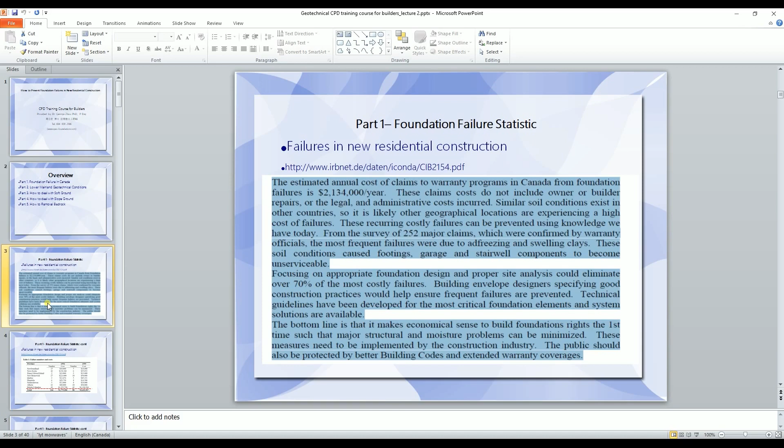Okay, the first part is the statistical analysis of foundation failure in Canada. This analysis was done about 10 years ago, and the reason I use data from 10 years ago is that it's fairly difficult to get this data, especially recent data. With any failure, people don't like to talk about it so much. So this data comes from an insurance company - they sent out inquiries to all those owners who suffered from failures, and this is the only data available to me. The absolute dollar value probably isn't accurate because it was 10 years ago. But the interesting thing is the percentage of failures, the failure distribution among all those provinces. I'll show you later on.

Okay, this one shows failures in new residential construction. You see that's in 1994 and 1995. In British Columbia, looking at the dollar value - you don't need to look at that, but you see the number - we had 43 failures in '94, and overall in Canada we had 164. So in BC we have about one-third of all failures happening here.

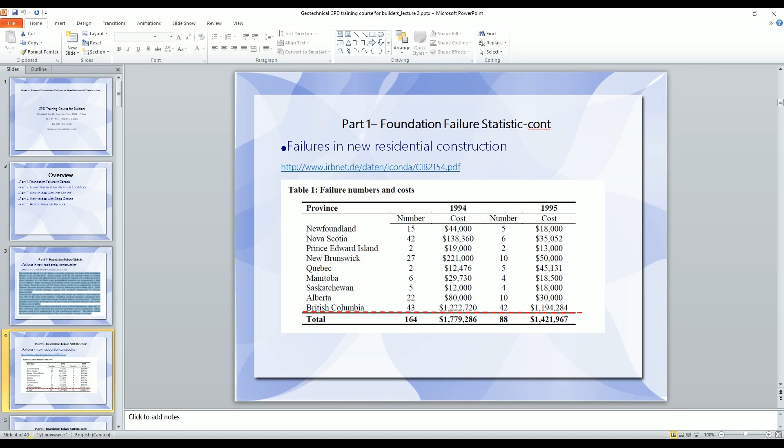The same thing, actually in 1995, about half of them happened here. Overall in Canada we had 88 failure cases, but in British Columbia we had 42. So that implies we have lots of failures happening locally in BC.

And this slide gives us a percentage failure, the failure ratio per 1,000 new buildings. So in BC, for every 1,000 new buildings we have about 2 case failures. This ratio is quite high, but compared to other provinces, other provinces are much higher, especially Newfoundland.

And the reason they have high failure rates is because of 2 reasons. One is they don't have enough engineers, especially good engineers, over there. And the other reason is about the weather - the weather over there is fairly cold, so they have lots of permafrost problems.

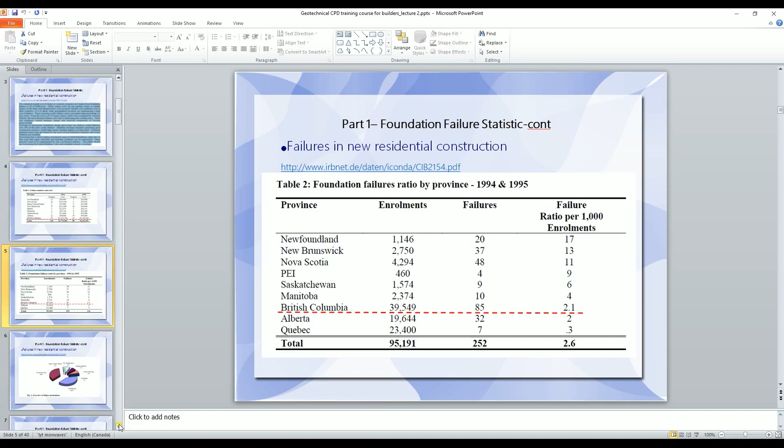This one is very interesting. The failures divide into different reasons. You see, most reasons are because of adfreezing, which relates to permafrost. And luckily, here locally we don't have these issues. Especially in the lower mainland, the frost depth is fairly shallow.

But if you take that half away, you see all of these other things can happen in BC. Most of them, like clay, means soft ground. If we take this out, soft ground is one of the major reasons - this is the highest one, this is the second highest. But in BC we don't have the permafrost problem, so one of the major reasons here is about clay, meaning soft ground.

And the second thing is fill settlement, also related to compaction of fill material. The next biggest one is slope failure. So later on we will talk about all of these - settlement, soft ground, and slope stability. That's why today we have this topic, like I mentioned previously.

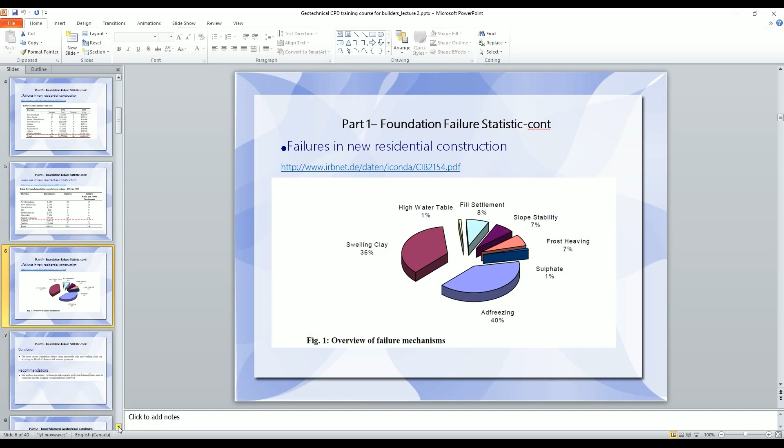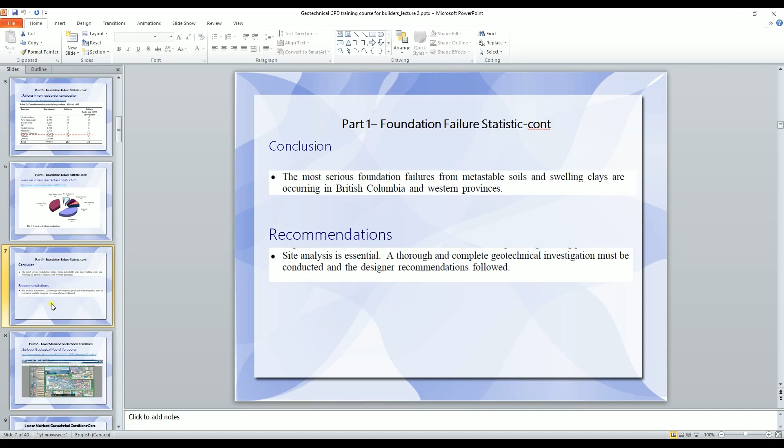Okay, the conclusion from part 1 is that the most serious foundation failure is for soft ground, soft soil, occurring in British Columbia and all over the western provinces. So my recommendation to everybody here is that site analysis is fairly important. For every site we need to do a geotechnical site investigation and understand the soil condition first, and then we can do the design properly.

Now, next I will talk about part 2. Maybe if you came previously, you are fairly familiar with this already.

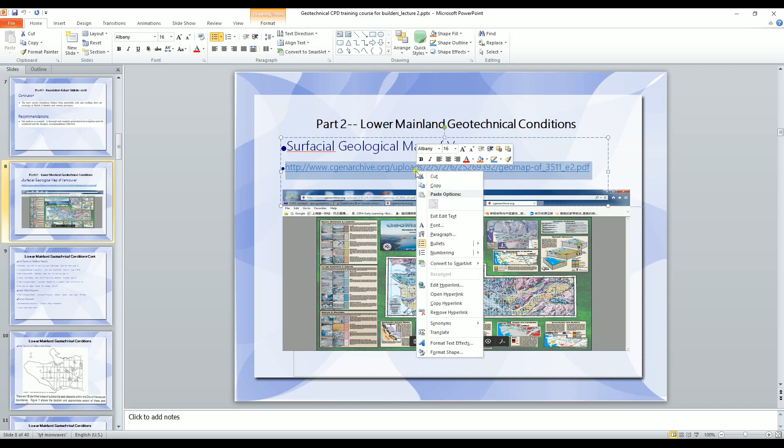In this map, I think the link isn't very clear, but let me copy this one. So this is the internet, right? If we come to here, that is the website, which is public government information. Everybody can access it. So it's free information for everybody.

In this map, you can see different sites in different areas. For example, in Richmond, we have two different zones. Most of them: west of No. 3 Road is one color, and east of No. 3 is another color. The color, they label this number 2, or number 3 maybe. I don't know how to enlarge it... okay, we can enlarge it.

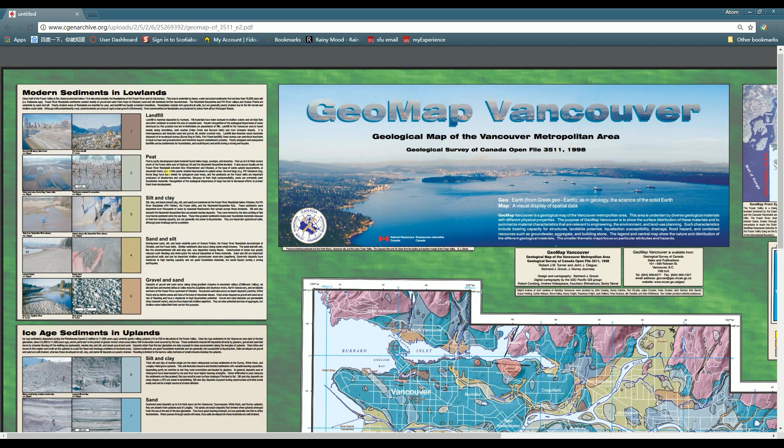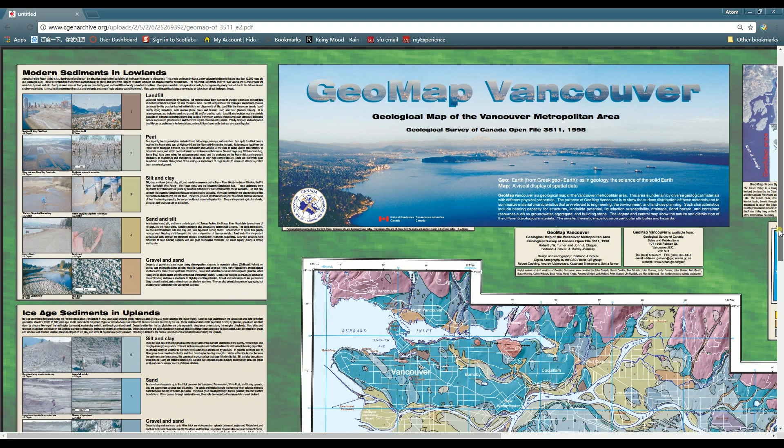This is number 2, this is number 3. If you read here, the legend tells you number 2 is peat, meaning organic material, and this area's organic material is fairly soft with fairly high water content. If you put a foundation directly on this soil, the water will be squeezed out and the foundation will settle a lot. So most of the time, if we build anything here, we need to do preload or use pile foundation.

The other side, which is silt and clay, is also fairly soft in the Richmond area. They have fairly high water content, and this material has a fairly low plasticity index, meaning during an earthquake it can liquefy. So for this area, when we design the foundation, we need a crust layer so that during an earthquake, after the underlying material liquefies, you have a temporarily enlarged footing that can prevent punch failure.

Like in North Vancouver and West Vancouver, the city requires that for any development of one unit, you can only remove a certain amount of bedrock. In West Vancouver, they allow a single house to remove only 600 cubic meters of material. If you remove more than that, you have to revise your design.

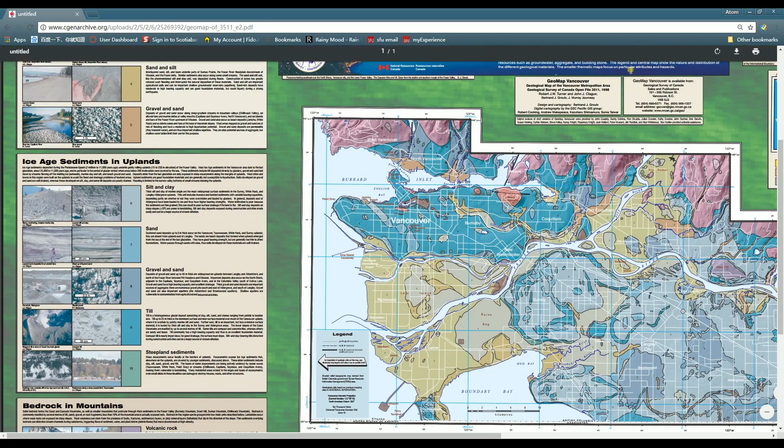If we look the other way around, upstream of the Fraser River, like in the Surrey area, we have clay, which is type 6 — clay and silt. This clay and silt is quite different from the clay and silt in Richmond's west end, because it's deposited at a higher level. The water content is lower, and relatively speaking, the capacity is still low, but slightly higher than in Richmond. Anyway, this is public data. Everybody should pay attention when you purchase land — you should read this map first and understand what material, what soil, you are dealing with.

Okay, let's go back to our PPT.

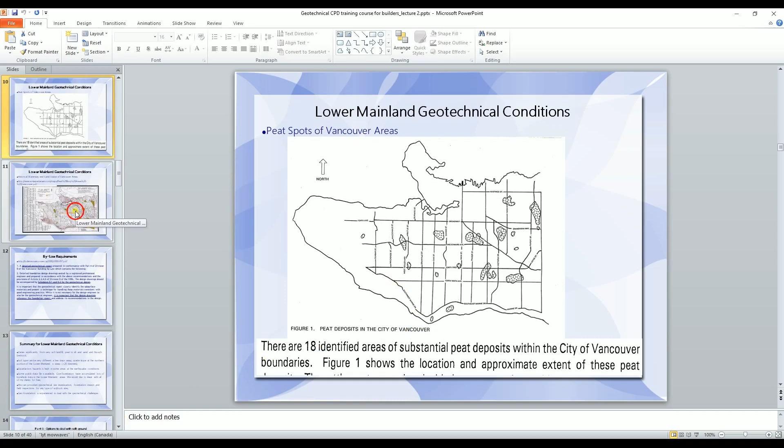Having talked about this, the soil condition is much more complicated than what we discussed previously. For example, in Vancouver we say the condition is fairly good, but actually that's not exactly true. Locally we have some variations. This map shows you 18 spots, very famous spots. This area is the location where you have peat. So overall, Vancouver is good, but you still need to pay attention to these particular locations.

The other thing you need to pay attention to when you purchase land is the historical use of the land. This is also available online. In addition to the 18 spots we talked about previously, this map also shows green lines, which are streams that existed maybe 100 years ago or even earlier, and these creeks were filled in. So if you build a house in this area, you need to pay attention.

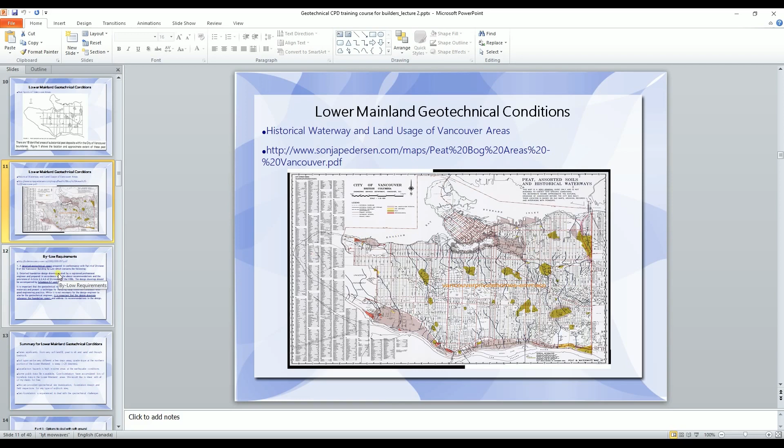A few weeks ago, I had a site in the English Bay near Alberta Street. This area has an existing building. When we went over there to do site investigation, we hit peat ground, from before 1982, when the old house was built and the creek was filled, but they had not removed the soft ground. So now we will demolish the house and build a new one. We found this is a problem we need to think about how to deal with.

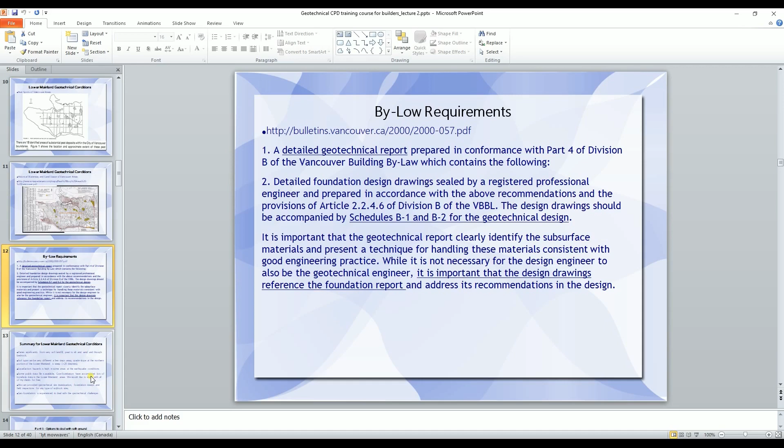If you have very weak material like peat or soft clay, city bylaws have requirements for foundation design. The city used to require a geotechnical report, but right now they haven't made it mandatory for a geotechnical engineer to design the foundation. The structural drawing can show the foundation design, but they ask the structural engineer to refer to the geotechnical report. That's the current requirement.

So the summary for part 2 is: overall, in the Lower Mainland, the site soil condition varies significantly, from very soft land to very hard ground. Soil type can be very different just a few steps away, and some areas are fairly steep, like in North Vancouver, where the ground can be over 20 degrees, so they have slope stability issues too. Also, lots of areas have liquefaction hazards in earthquake conditions.

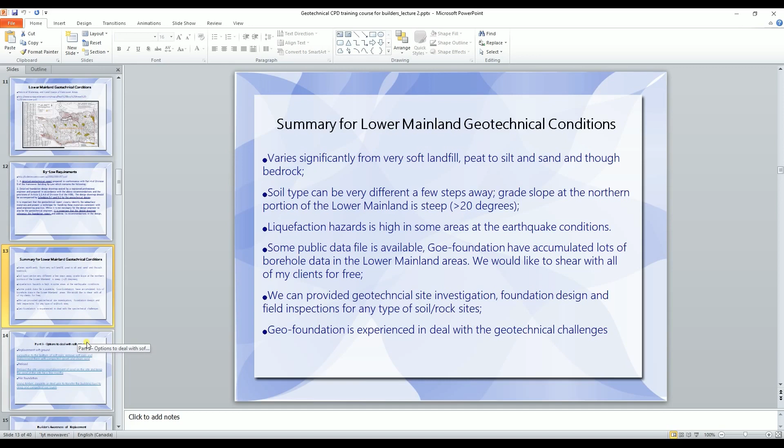But anyway, that data is publicly available and free. Everybody can access it. My company can also provide all that data to you. In addition to the public data, we've accumulated lots of boreholes in the Lower Mainland area over the last 20 years. It's really a good idea: by the time you make a decision to purchase land, you need to ask your realtor. If the realtor has no geotechnical background, you'd better ask a geotechnical engineer.

That's part 2. Well, we're going very fast. I think we still have time.

Now I'd like to talk about part 3, which is: while you do every effort and find out, talk to your realtor, talk to your geotechnical engineer, and the ground is not good, when you purchase land you put a term in the contract saying subject to review of a geotechnical report. By this time you've got the land, and you hire a geotechnical engineer to come do site investigation, and they find the area does have soft ground.

Then we need to deal with the soft ground. Soft ground is not the end of the world. We geotechnical engineers can deal with it anyway. We have different ways to deal with it, and some of them are fairly cost effective.

For example, if the soft ground is not so deep, less than 2 meters shallow, and the water level is over 2 meters deep, for this condition usually we can replace the soft ground. That means you do excavation, remove the soft soil, and replace it with sand and gravel, compacting it layer by layer. After doing so, you can put your foundation on the compacted material.

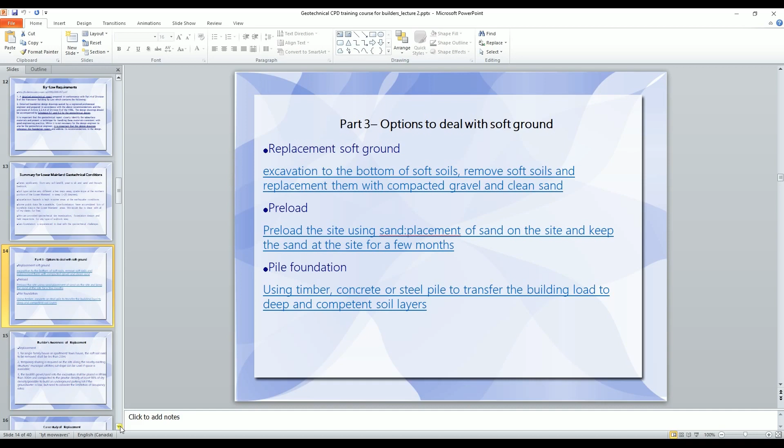The other thing for timber piles is decaying. The sections permanently underneath the water table will not decay, it will be good forever. The portion always above the ground is also okay. But one section sometimes gets submerged, sometimes becomes dry. Because the water table fluctuates seasonally, those sections can decay, so you need to pay attention.

Usually, previously we needed to put some chemical material so that it wouldn't decay. I don't know what the chemical name is, but anyway, that's one of the reasons timber pile right now is not so popular.

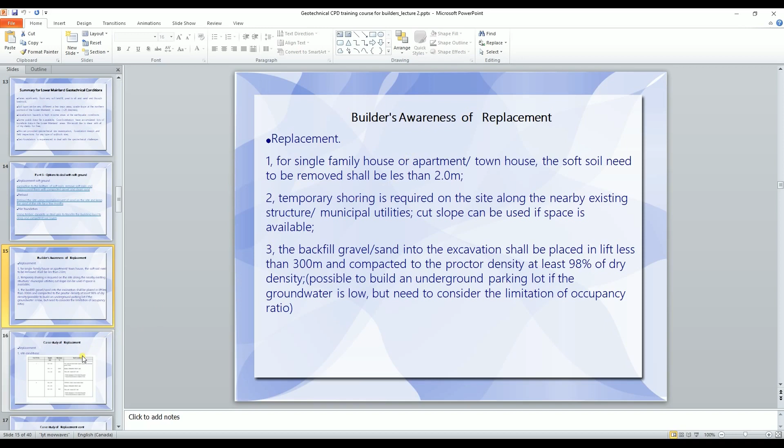Okay, actually for this one, the further description of replacement, I think we mentioned that already, right? I think we told this already. This is one example of the site condition where we use replacement, which is in number 6 Road.

And in a farmland, we did site investigation, and this is the soil condition. The top, like 1.2 meters, from 0 to 1.2 meters is organic peat. The top is fill, and within this we still have some silt. But if we remove 1.2 meters of material, for the residential building that's good enough.

So for this case, we decide to remove the top 1.2 meters material and then build it that way. Here is the way, the building goes over there. The top 1.2 meters material is removed. But be careful, when you remove it, you've got to remove slightly larger - the footprint should be slightly larger than your building.

And you've got a slope, like a 2-to-1 slope, and while you do excavation, you do it this way. So the excavation area is also larger than the area where you put back the material.

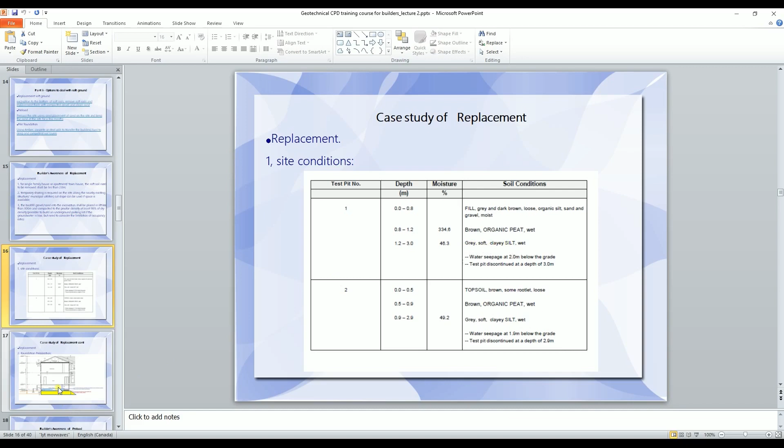Because if you still remember the borehole log, after the 1.2 meter materials, we still have soft clay. So the soft clay can also settle. So we did some calculation and made the decision that in this area where you backfill 0.6 meters, that 0.6 meters should be lightweight material.

Okay, and the second option, we talked about preload already. For preload, I think every builder needs to be careful. Preload is not as simple as just dumping some sandy material aside and leaving it for a few months, then removing it and you can build. No, it's not so simple.

Actually, the right way to do it is we need to do site investigation and we need to do the preload design, to determine the preload height - how much material, how high and how big the footprint we need to preload. Especially for some areas, if you develop in phases, like phase 1, phase 2...

For a big area, if you're using preload, usually the land is fairly large, and most builders would like to build it in phases so that you don't have cash flow problems. And while doing this, you need to decide how big phase 1 needs to be preloaded, and make sure the next phase preload will not impact the phase 1 structure. So those things you need to take into account.

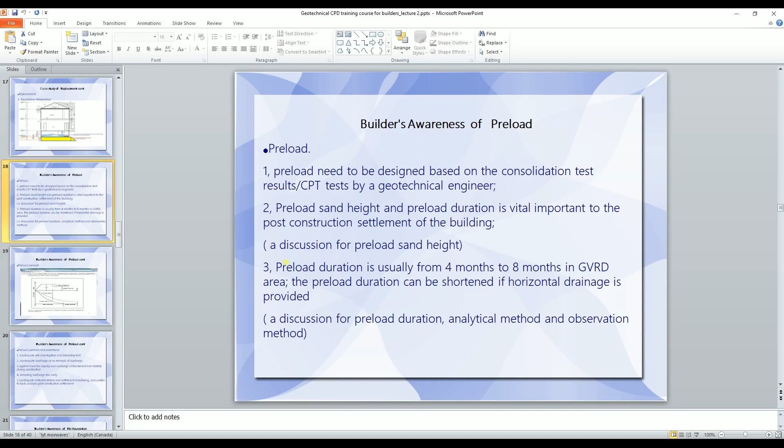The preload design, actually, for the time and height, when we design it, we need to take some soil samples aside and do a 1D consolidation test in the laboratory and find compression index and compression coefficient.

And you need to know the drainage layer distribution. Based on the 1D consolidation theory, you can predict how high the preload will be and how many months, how long the preload needs to be at site.

Which have rebar extending from the base all the way to the top of the sand, and the survey guy needs to come. The first week they come probably every day. The first month they come at least every week, and second month they come like once a month, less frequent.

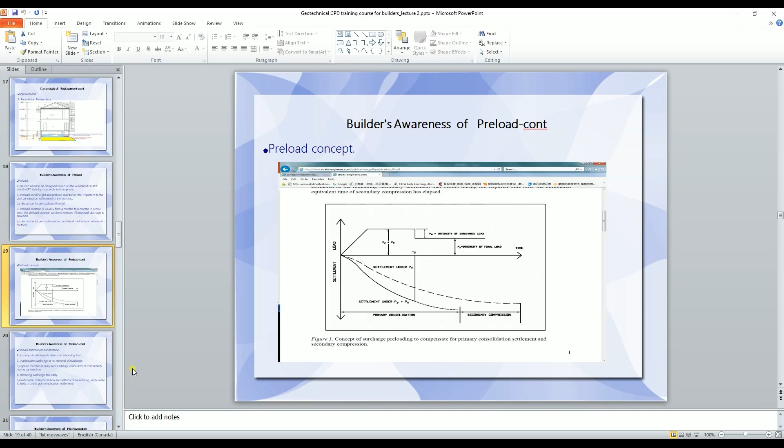And how long you have to keep it dumped on it. If you dump only a week or a few days and remove it, you will not achieve the intention. Even though you preload it later on, you still have problem.

So those are some common misunderstandings of the preload. One is inadequate site investigation and laboratory test. Means your site investigation didn't go deep enough, for example, too shallow. Your weak material is thick, and the thicker it is, the more settlement there will be. If your site investigation is not adequate, you will have problems later on.

The other thing is because the site information is not so clear, so when you do design, your surcharge height, meaning your preload material, is not enough, or you remove your surcharge too early. Even very professional guys can make this mistake.

One famous settlement case is an airport in Japan. They have had settlement for many years. I cannot remember the city name, but it's a world famous case. The area is huge, very large, and near an island. The whole airport is created by infilling the waterfront, and the predicted settlement in the airport's life, they say, is only 1.2 meters, but actually in the first 3 months they settled 1 meter, and right now they're still settling.

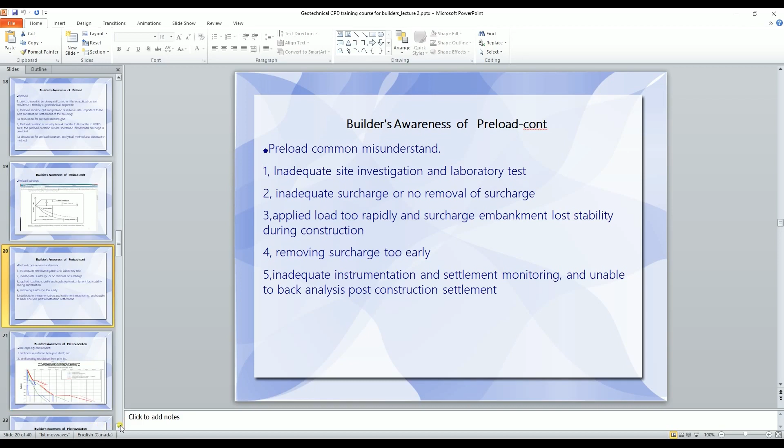Okay, let's keep on going.

The next one we will talk about is the pile foundation. As a builder, you need to be aware that the function of pile is to pass the load from the shallow depths through the pile structure, through the pile element, to the underlying hard ground. While you put a loading on the pile, there are two resistances from the pile: one is the friction from the pile shaft, the other is the bearing resistance from the pile tip.

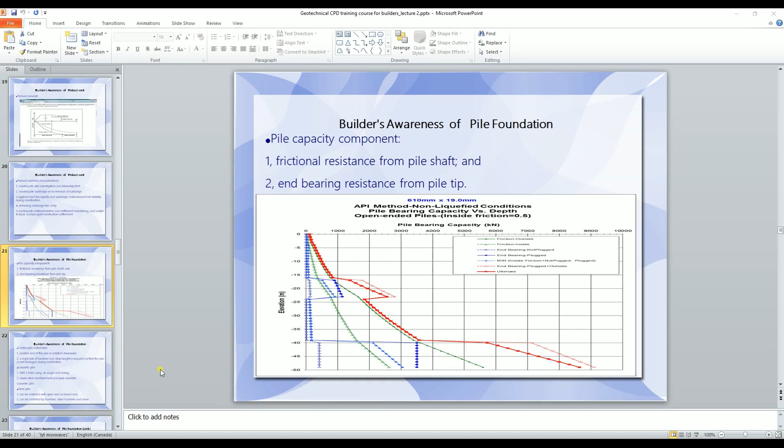The pile resistance, the friction resistance, comes from the lateral earth pressure. The lateral pressure multiplied by the friction coefficient, multiplied by the perimeter area of the shaft, gives the shaft resistance. The bearing resistance is the bearing area multiplied by the unit bearing capacity.

Previously we said we have different types of pile. For example, we have timber pile, and when we install a timber pile, we need to install it upside down - meaning the small end needs to go downward, and the big diameter on top. That's the way we squeeze the pile into the ground so we have friction on the shaft. If we do otherwise, it's very difficult, even impossible to install, because it tips this way while loading.

While you install a pile, the pile is not pushed against the soil but tries to leave a gap in between, so you don't have shaft resistance. Make sure you install it the right way.

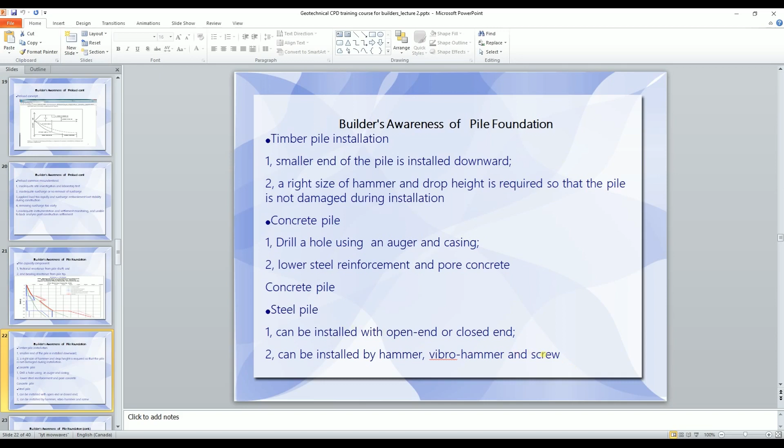And for steel pipe pile, usually their capacity is fairly large. So when we install it, we can use a diesel hammer, or we can use a hydraulic hammer. Quite often they are used for industrial facilities, and for example, for bridges, those things.

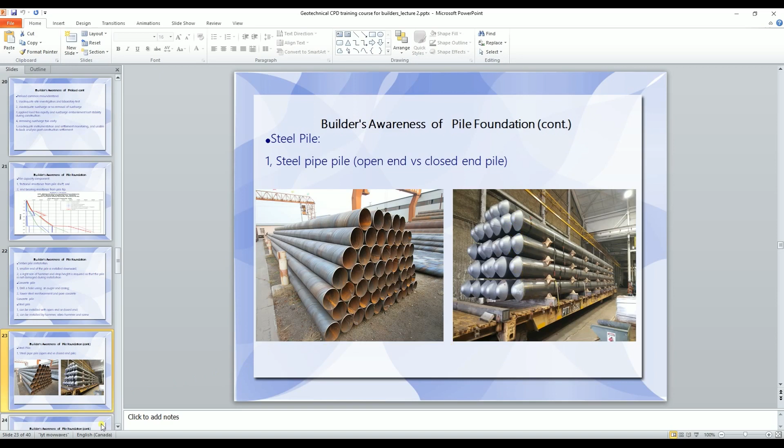For residential buildings, instead of the steel pipe pile, we are using the screw pile. I can show you - this is the steel pipe pile, and here this is the open end pile. We install it with an open end, both ends are open. And this one we enclosed with a cone shape - you seal it, then you can install it as a closed end pile.

Also, for steel pile, depending on the condition - if the ground is fairly gravelly and very hard to penetrate, we can use H piles. And for H pile, when we do the calculation, it depends on what soil condition it is.

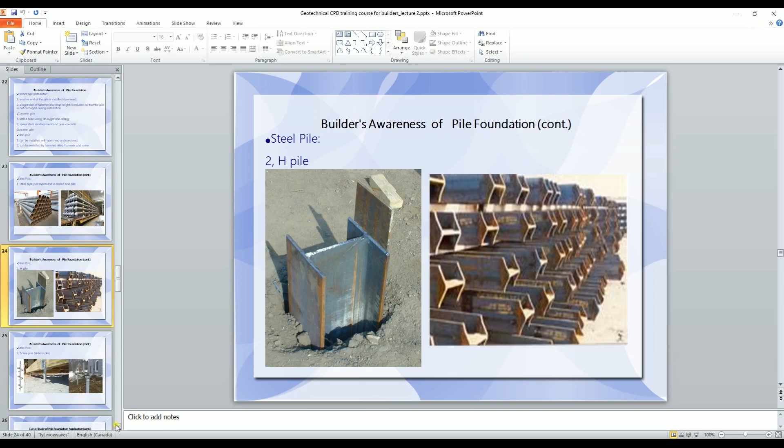If it's installed in sand, the skin friction is actually from the external and internal here, the U shape, the H shape internal, and end bearing is just from the steel area. But if it's installed in clay, then the skin friction is just a square - we calculate the square area, and the end bearing is also the tip of the square, treated as end bearing. So there are different ways to do the calculation.

So because the shaft is fairly small, you do need a plate, which is the screw plate, to give you larger end bearing. And usually you can use a few - sometimes they have 3 screws, so that you can increase the bearing capacity.

However, even though you can do this to increase bearing capacity, because the shaft is so small, when you do design, you do not only consider the vertical bearing capacity, but also you need to consider the wind load, which is applied horizontally. So this pile's horizontal stiffness is small.

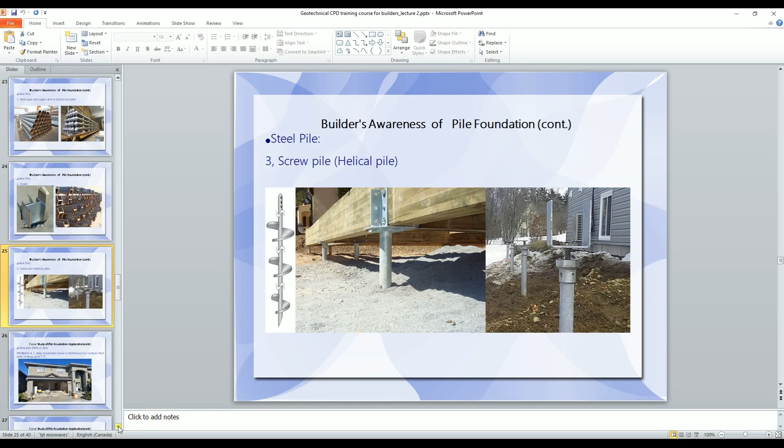And in order to make sure the pile has adequate lateral capacity, usually we tie different piles together using a structural element, to ensure the pile works as a group and has adequate lateral capacity.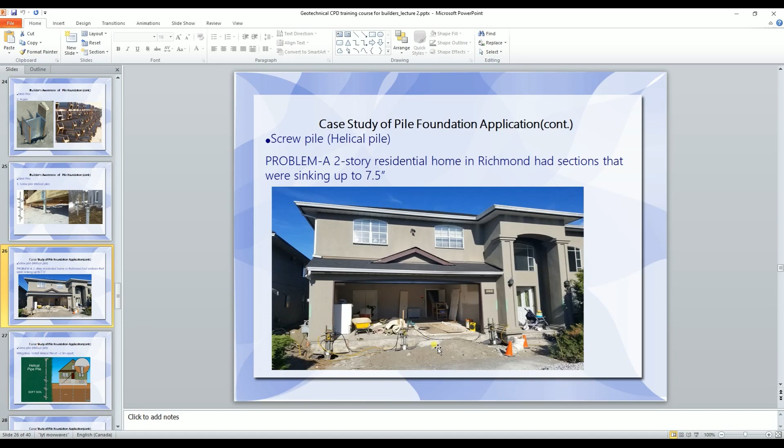This usually happens because while doing the construction, you didn't know the ground condition quite well, and there was soft ground that wasn't taken into consideration. After a few years, the ground settles, the door cannot open, and the wall cracks. Usually I get a phone call every year, at least 3 or sometimes 10 times for this project, and when we come to the site, we install this screw pile.

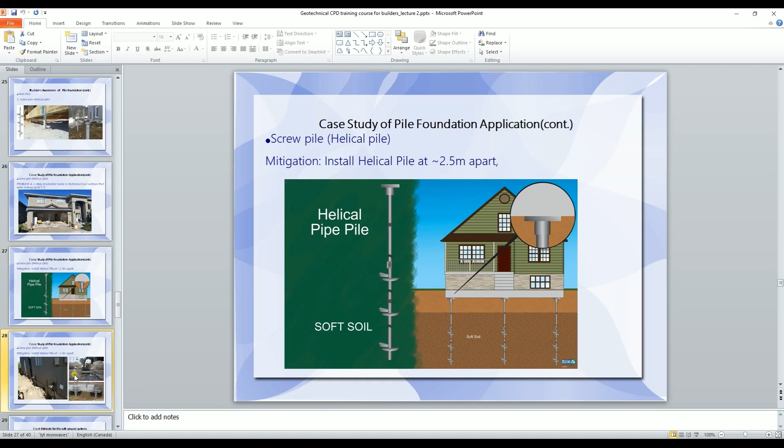This one is a case study for the screw pile for a new building. When we install the building this way, we use the slab to tie the piles together to increase the lateral capacity. The screw pile will go through the soft ground, and the tip will reach the hard ground, so the plate is sitting on the hard ground and has adequate vertical capacity.

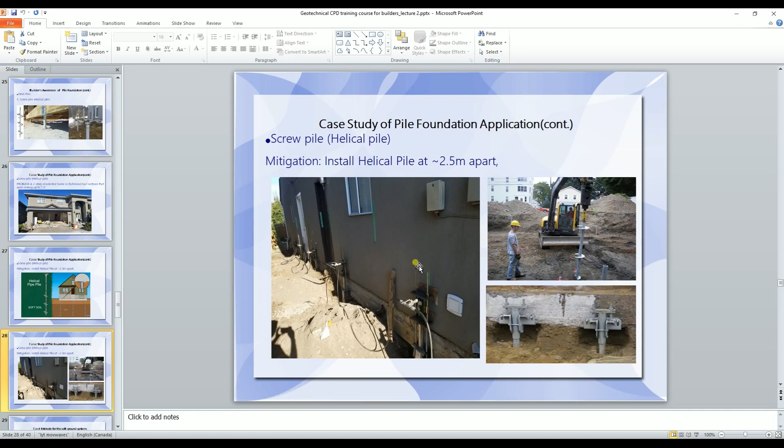This is the one where, while we jack it up, we need to make lots of marks on the wall, because the ground previously had cracks. While you jack it up, make sure the crack closes, and you don't want to jack it up too much.

The second cheapest one is replacing the soft ground. The cost is acceptable, but it has some limitations - it cannot be used universally, since the soft ground cannot be more than 2 meters thick. The pile foundation is actually the most expensive, but the thing is, you can install immediately and don't need to expose yourself to the risk of market condition variations.

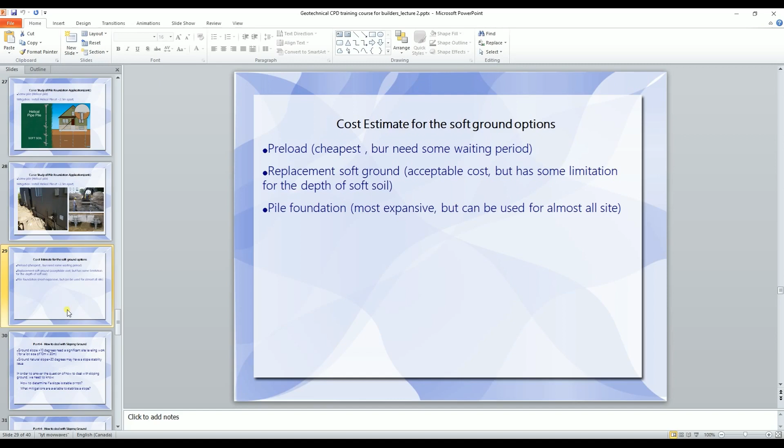The other thing about preload - yes, it's cheap, but for a few months or a year, you have already purchased the land, and some land is fairly expensive. For that year, your money is actually put in the ground and you cannot use it. This is something else you need to take into account. If you've borrowed money from the bank, you have to pay interest, so it can be expensive too.

Okay, now we will talk about part 4. Part 4 is how to deal with sloping ground. If you recall part 1, in BC we have 2 critical issues. One is soft ground, which I talked about how to deal with. The second major thing is sloping ground - the second major geotechnical hazard we need to deal with.

For ground that is over 10 degrees steep, you need significant site leveling work. For example, with a lot size of 10 by 30 meters, if you have a 10 degree slope, the difference can be 4 or 5 meters. Because our house's internal grade cannot be a slope, you need a flat ground anyway, so you need to think about how to make use of the land. Usually you need to remove soil on the high end and backfill the low end. But if the natural ground is over 20 degrees, in addition to this, you may also have stability problems.

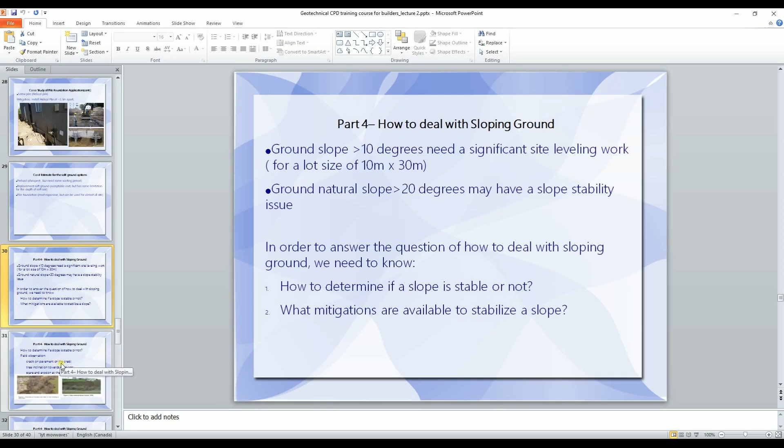Now, in order to answer the question of how to deal with sloping ground, first of all, we need to determine whether the slope is stable or not. Second is, if it's not stable, how to mitigate it and make it stable.

Now, as a geotechnical engineer, what do we mean by the ground being stable or not, and how do we do analysis and come up with a conclusion? First, we come to the site to do a field observation. For example, we check if the pavement has cracked, if the tree is straight or inclined towards one direction. Most of the time, if the ground is not stable, the tree inclines towards the slope toe. This means over the years the ground progressively moves and the root moved from one location towards the slope toe, that's why the tree cannot be straight.

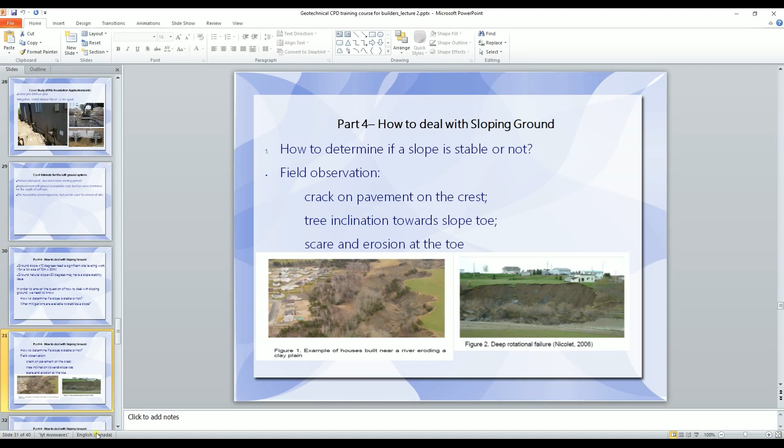The other thing we pay attention to is the scar or erosion, especially if the slope is a waterfront property. If the toe was eroded, usually the ground at shallow depths has some movement, or there's even a scar on the crest at the top of the slope.

In large cities like Chilliwack, Mission, at the north side of those cities, they have lots of unstable or landslide hazard areas, and those municipalities ask for a permit if the property is within certain areas in the city development plan. They ask you to provide Appendix D, a permit which must be signed and sealed by a geotechnical engineer. They have three different permits - one is subdivision approval, which is for a larger area.

The second thing is the building permit, which is only for one piece of property. The other thing is the development permit, which means you have an existing house on the land already, but right now you need to make some modifications or changes to existing buildings. Then you need a development permit.

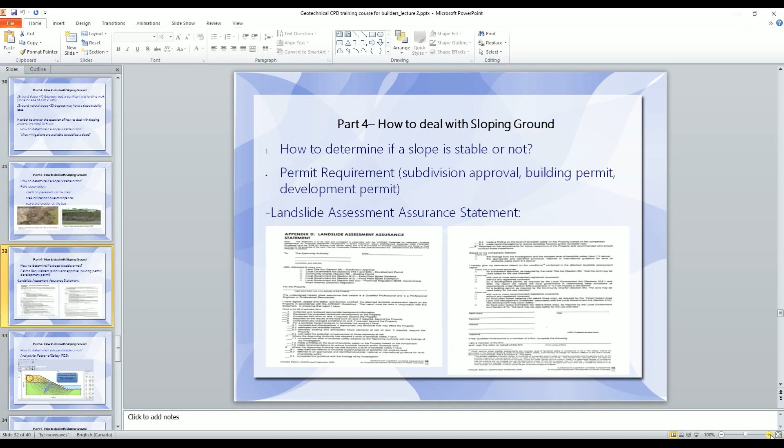This probably is not very easy to read. I can make it larger for you.

So basically, this is the whole thing asking the geotechnical engineer to do. I don't want to go into too much detail, but as a geotechnical engineer, for each item we need to say what we have done, what we have found, whether there are any movements, and whether we think it will be an issue or not. If you think there's no issue, then you sign your name and you can get the permit.

That means the geotechnical engineer takes a risk - you don't need to worry about it. Later on, if something happens, if there is some landslide, the geotechnical engineer might have some liability insurance to cover the site.

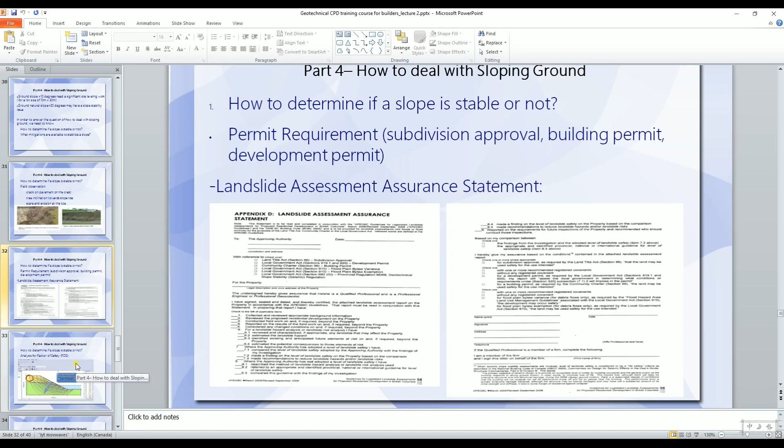But on the other side, if the geotechnical engineer thinks there are some issues, they have to point out what the issue is and how to deal with it. Later on, the city will also give you a permit, but it comes with conditions. You need to follow those geotechnical recommendations and make sure they are fulfilled. Then you can build on this site.

Now for a geotechnical engineer, when we come to a site, we look around and see all those things - that's only one side. The other side is what we will do: make a site investigation, find out the soil condition, and then do a slope stability analysis.

While we're doing the analysis, we need to assign engineering parameters like shear strength, the internal friction of different materials, and then we find out the factor of safety of the slope.

What does it mean, the factor of safety? The factor of safety is actually the resistant load divided by the driving load. The resistant load comes from the soil strength.

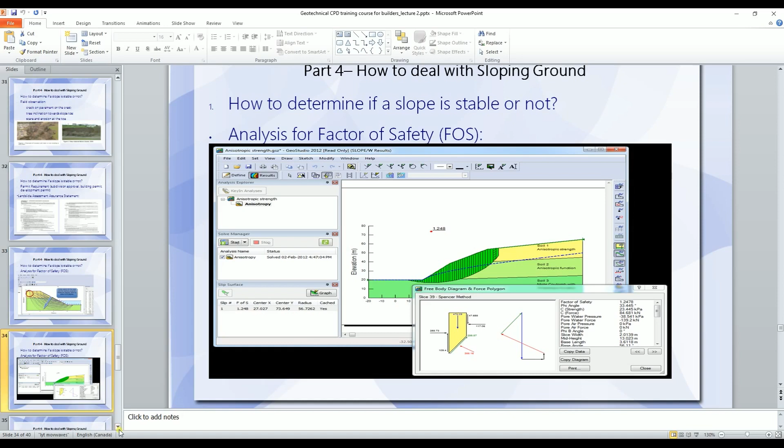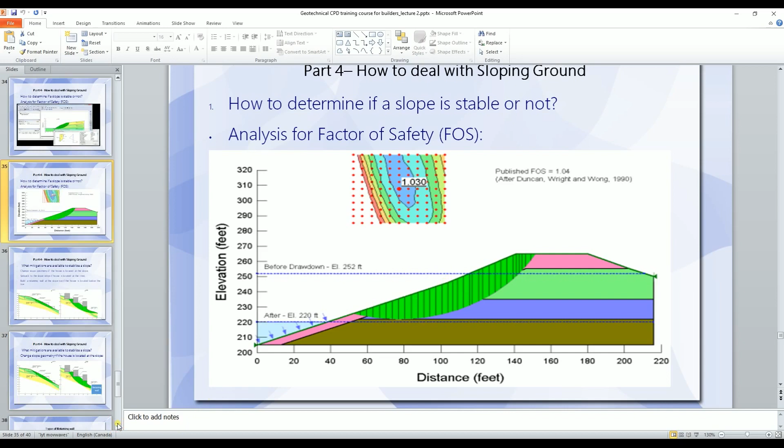But this analysis is just to confirm our conclusion. For example, for a slope that is not stable, we need to determine how much volume is involved. Like this one, the factor of safety is about 1, meaning marginally stable—the ground will fail soon. While we are doing the development, we can still do it because we can put a loading on it, this loading from your structure, from your building.

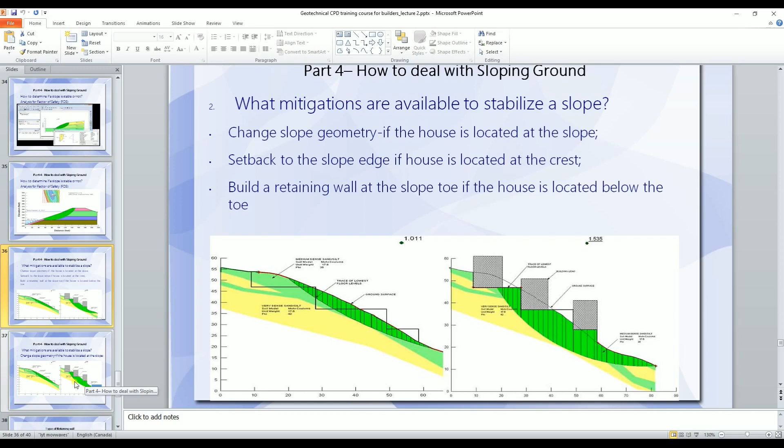Here we can change the slope profile. For example, in this area, we can put some loading, like a berm, a retaining wall, or an anchor, so that this slope overall will be stable. That means you need to increase your cost. So in addition to building a house, you need to make sure the ground is stable. Otherwise, if the slope fails, your structure will also fail.

So that's one way to mitigate the slope, which is to change the geometry if the house is located at the slope. But if your house is located at the crest of the slope, then you need to set back, meaning you will lose this piece of land—you will not build your foundation here. You set back a few meters away from the unstable area. That's the other way you can do it.

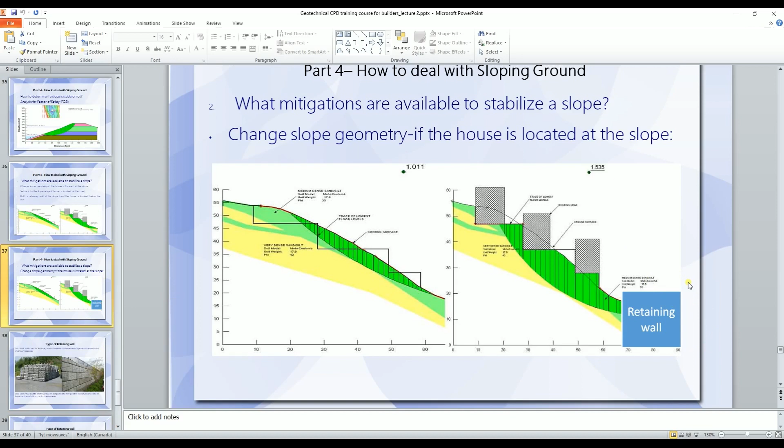However, if you're setting your ground below the toe, then you have to build a slope here. For example, this is potentially not stable, so then you have a slope here, you put a retaining wall here, then you build your house below the toe. That's the way it goes.

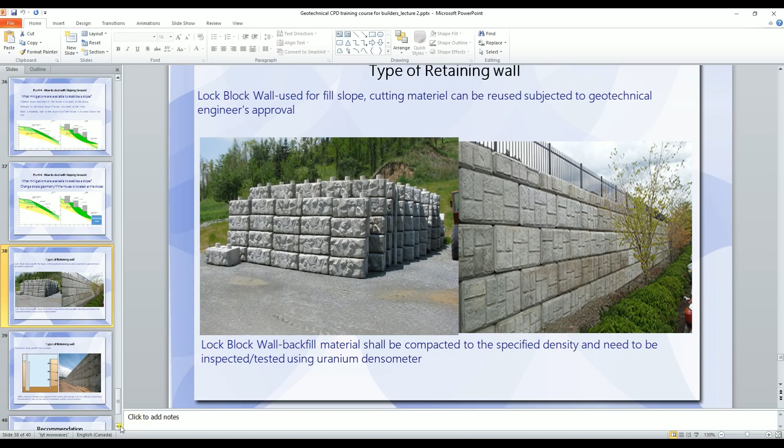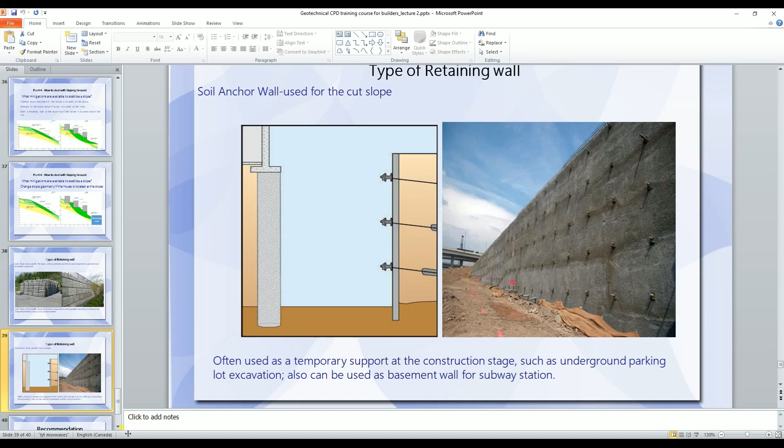So for part 4, in sloping ground, my recommendation to the builder is you need to contact a professional geotechnical consultant while you are at the land buying stage, so that as a builder you understand your project site at the very beginning. And we will provide our geotechnical consultation for free at this stage, because we have topographic information for those areas potentially have hazard.

For example, in the city of Delta, we have the topography. If you go to the city website, you can get free topographic information for every area. It's not available for every municipality, but for those areas that potentially have problems, usually they provide the topographic information. Even if it's not available, you can purchase it at fairly minimal cost to get this information.